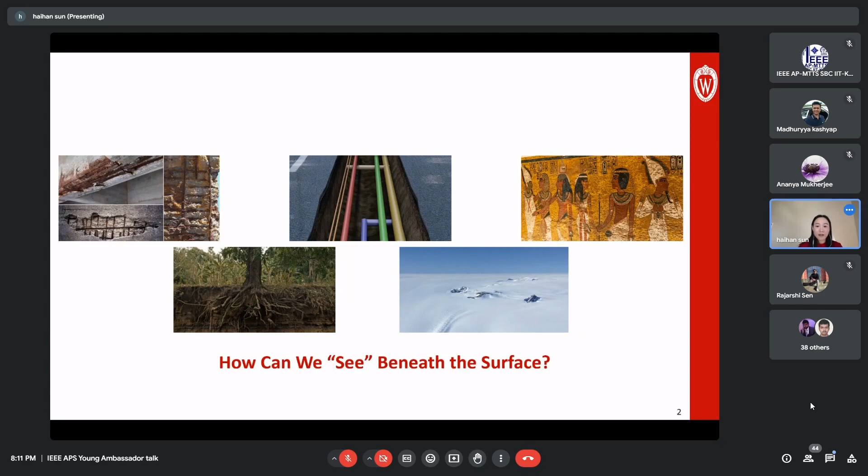Well, ground-penetrating radar is a non-destructive tool that uses electromagnetic waves to inspect the subsurface environment. If we use ground-penetrating radar, or in short GPR, to scan an area, the transmitting antenna sends out electromagnetic waves into the ground. When the wave hits a buried object with different electrical material properties, the wave will be reflected back to the surface and acquired by the receiving antenna.

At one antenna location, we'll receive the reflected signal as a function of two-way travel time and signal amplitude. We call it a one-dimensional A-scan. In this case, we'll observe two main reflections. One is the surface reflection coupled with the antenna crosstalk, and we'll have the object reflection shown here. The distance from the object to the surface can be calculated based on the two-way travel time and the propagation velocity of electromagnetic waves in the subsurface medium.

And the power of this reflected signal from the object is governed by the well-established radar equation. It is a complex function of the transmitting system, receiving system, signal loss at the air-to-ground interface and along the propagation path, the object radar cross-section, as well as any polarization mismatch in the wave transmission and reflection process.

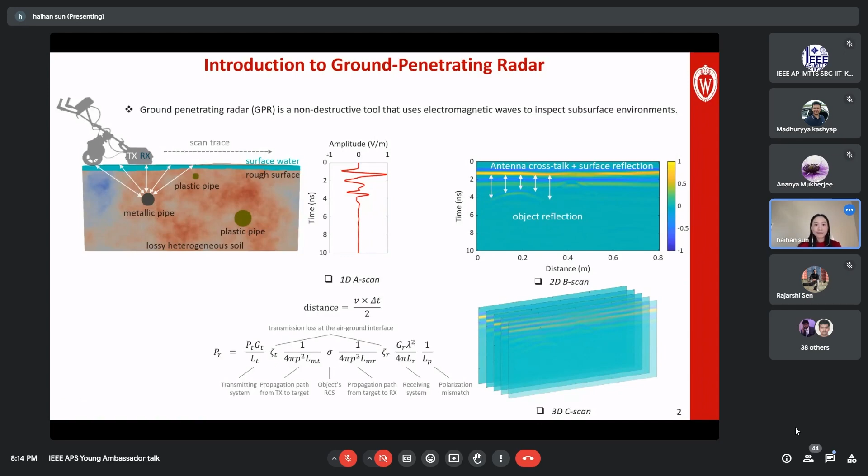GPR is definitely not a new technology. It has a long, rich, and fascinating history spanning across different disciplines over the past century. I read some stories online, and it turned out that GPR technology can be dated back to 1904 when a German engineer, Christian Hülsmeyer, invented the early form of radar to detect distant metallic objects. Then 6 years later, 2 German scientists patented the first use of continuous wave radar to locate buried objects.

Then later on, Dr. Hülsenbeck patented the first use of the pulse technique to detect subsurface structures, which greatly improved the depth resolution. And for the next 30 years, ground-penetrating radar was mainly used to probe the depths of ice, glaciers, and fresh water, as these are ideal media for electromagnetic wave transmission.

Then the turning point came when NASA launched the Apollo 17 mission, which used a GPR unit to study the moon's surface profile and interior structures. And this historic moment really brought GPR into wide attention and triggered widespread applications of GPR.

For the next 20 years, GPR has been utilized in many different fields, for example, in civil engineering to locate voids, tunnels, cables, in geotechnical engineering to explore underground mineral resources, in archaeology to find buried structures and caves, and in the military to detect tunnels and landmines to save human lives.

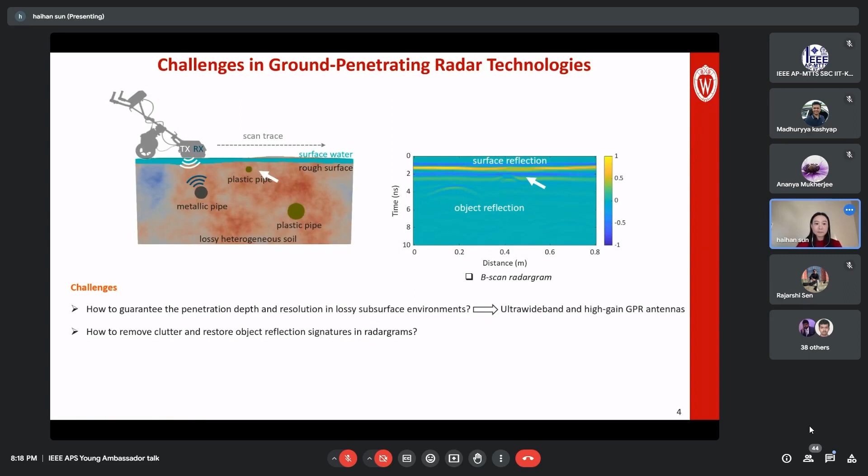And then once we collect a GPR radargram, how can we use the object signatures in the GPR radargram to characterize subsurface objects? For example, the object size, material, orientation. This will greatly help us to improve our understanding of the subsurface object. And is there a way to map the subsurface environment with high resolution? This is the ultimate goal for us, to visualize the subsurface environment, right? So all of these challenges call for advanced data processing and imaging algorithms, and our research has been devoted to addressing these challenges.

So first, to improve the detection capability of objects of different characteristics at different depths, we have invented and tailored multiple dual-polarized antennas and compact arrays to well detect objects in different specific applications, which I'll introduce later. A common feature of these antennas is that they all have broad bandwidths over 4 GHz. The frequency band generally ranges from below 1 GHz to above 4 GHz.

And these antennas enjoy great port isolation and have high antenna gain, which guarantees the penetration depth, resolution, and polarization purity of the ground-penetrating radar system. These antennas are specially tailored to have a compact size, so we can easily implement them in a portable GPR system. Once we designed antennas with high performance characteristics, we have used them to collect radargrams in many different applications.

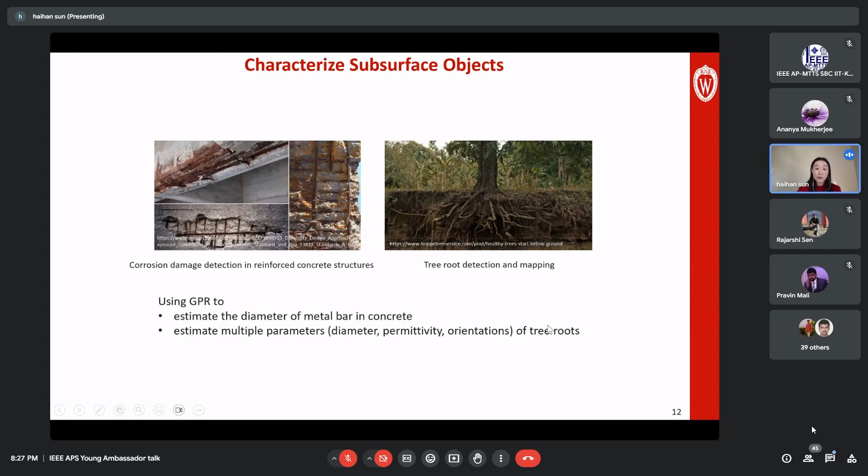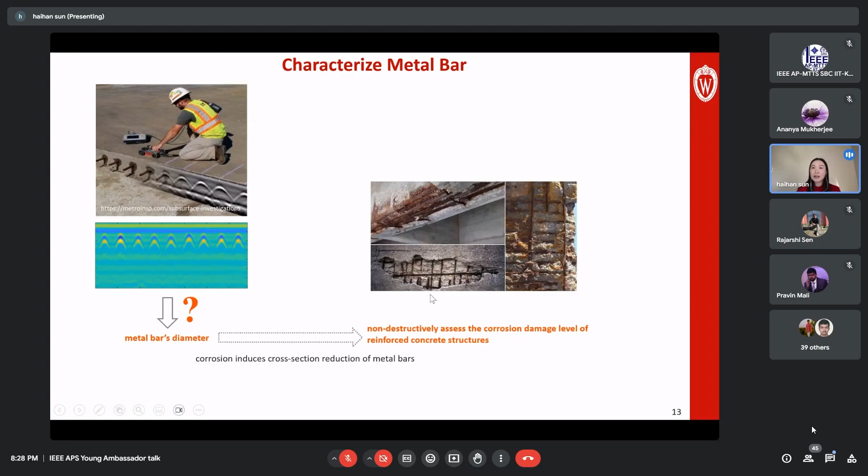GPR has been a great tool to detect reinforcing bars in concrete, because we know metal is a great reflector, it's a total reflector, right? But how to quantify the metal bar size has been a very challenging task. You probably want to know why we should estimate the size of the metal bar? Well, the thing is that corrosion induces cross-section reduction of the metal bar. So if we could precisely measure the metal bar's size embedded in the concrete infrastructures, we can use it as an indicator to assess the corrosion damage level of the reinforced concrete structures.

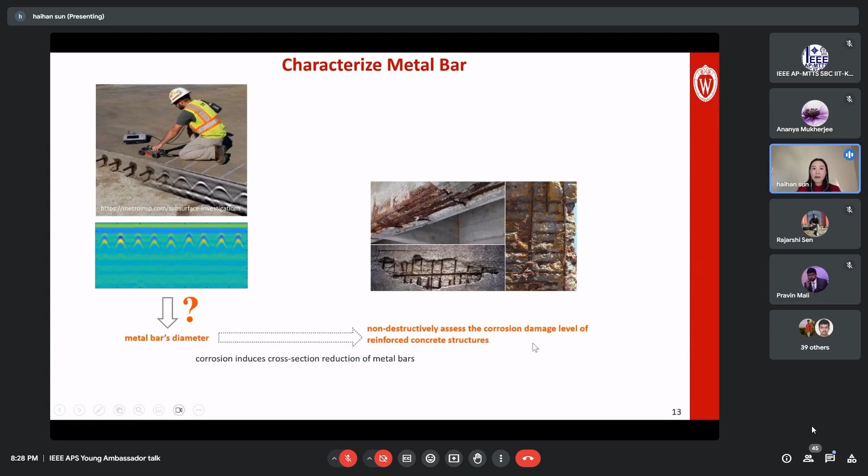So how can we precisely measure the diameter of the metal bar? Well, we have developed two methods to achieve that. The first method is based on the radar cross-section theory. So we call it a radar cross-section method. For this method, we know that metal bars will reflect electromagnetic waves, but metal bars with different diameters respond differently to electromagnetic waves with different polarizations.

So for example, if we use an antenna system with polarization that is parallel to the metal bar's orientation to detect this metal bar, we can receive a pretty strong reflected signal from the metal bar due to polarization match. But if we use an antenna system with polarization perpendicular to the metal bar's orientation, we'll see that the reflected signal from the metal bar is much weaker compared to the parallel polarized case, right? So what we want to do in our work is establish the relationship between the diameter of the metal bar and the ratio of the reflected power in these two dual-polarized antenna cases. And then if we could establish this relationship, we can use the power ratio to derive the metal bar's diameter in real measurements, right?

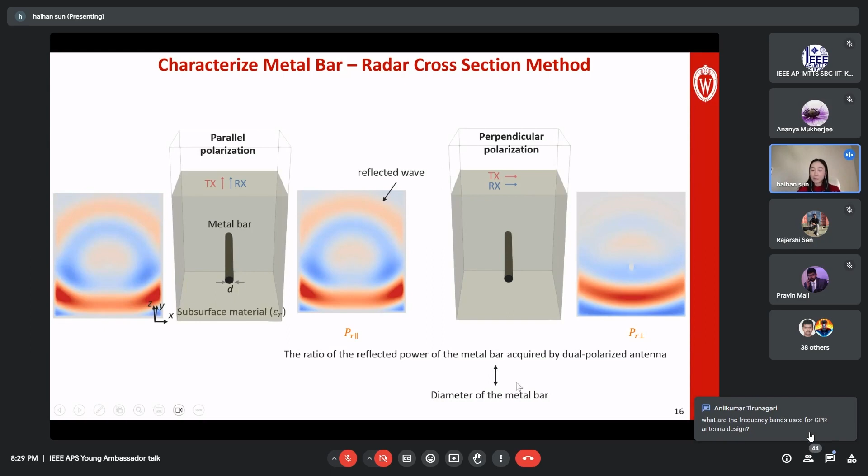So our method is like this. If we only use one polarized antenna to detect the reflection from the metal bar, for example, we use an antenna with polarization that is parallel to the metal bar's orientation to detect this metal bar. We know that the reflected power of this metal bar is governed by the well-established radar equation, as we mentioned earlier. It is a complex function of multiple system parameters, the signal loss along the propagation path and on the air-to-concrete surface, and the scattering width of the metal bar. The scattering width of the metal bar is directly associated with the diameter of the metal bar.

So you might think, well, seems like we can use this acquired power to directly characterize the metal bar's diameter, right? But the challenge is that in real cases, there are so many system parameters that are hard to be precisely quantified. But don't worry, we can introduce an antenna with a different polarization, the perpendicular polarization, to acquire the metal bar's reflected signal. And in this case, the reflected signal from the metal bar is also governed by the same radar equation shown here, while the only difference is the scattering width of the metal bar to this perpendicular polarization.

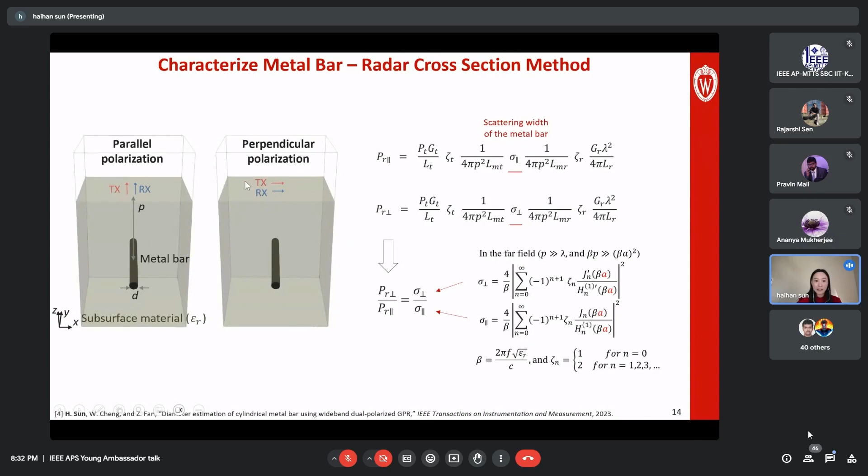But when you think about ground-penetrating radar, it's a wideband device. So it's not very feasible to use a single frequency to characterize a wideband performance. Sorry, I'm not sure why the equation is shown here, but it's easier and more robust to use the ratio of the maximum power collected by these two antenna systems in the time domain to characterize the metal bar's radius. So we further incorporate the inverse Fourier transform and broaden this power ratio relation to the wideband power ratio relation.

So what we've done here is that we build a relation between the peak power ratio acquired by these two antenna systems and the metal bar's radius, as shown in this equation here. We won't go into the mathematical details due to the time limit. But once we have this relation, we can use this relation plus the power ratio acquired in the measurement to characterize the metal bar's diameter.

In our experiment, we have used our self-designed dual-polarized Vivaldi antenna operating across a broadband from 0.5 GHz up to 3 GHz to detect the reflected signal from the metal bar, calculate the peak power ratio, and then use this equation to derive the metal bar's radius or diameter. We have conducted numerous simulations and experiments to verify the performance of our methods. And here we show the estimated results in 8 different metal bar cases. The metal bars have different diameters.

From these images, we can see that the estimated diameter agrees very well with the real diameter of the metal bar. And the estimation error is well below 10%. It's below 6% in different cases. So this provides a method to well characterize the metal bar size. But you might notice that this is a numerical-based method.

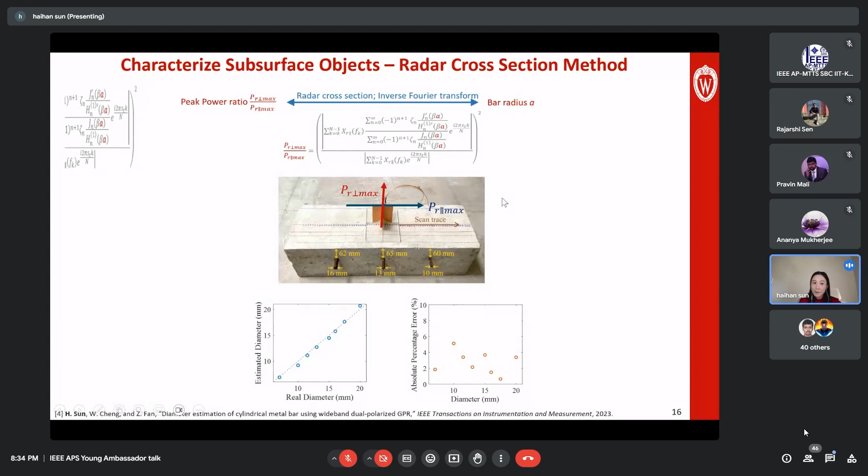So later on, my collaborator, Dr. Weixia Cheng from Nanyang Technological University, suggested: can we combine the imaging algorithm with metal bar sizing to provide a more intuitive understanding of the metal bar? So we can see the metal bar and know the size, right? So later on, we carried out another work where we use a linear antenna array with 15 Vivaldi antenna elements to acquire the reflected signal from the metal bar. Basically, we acquired 15 by 15 full matrix array data for each metal bar.

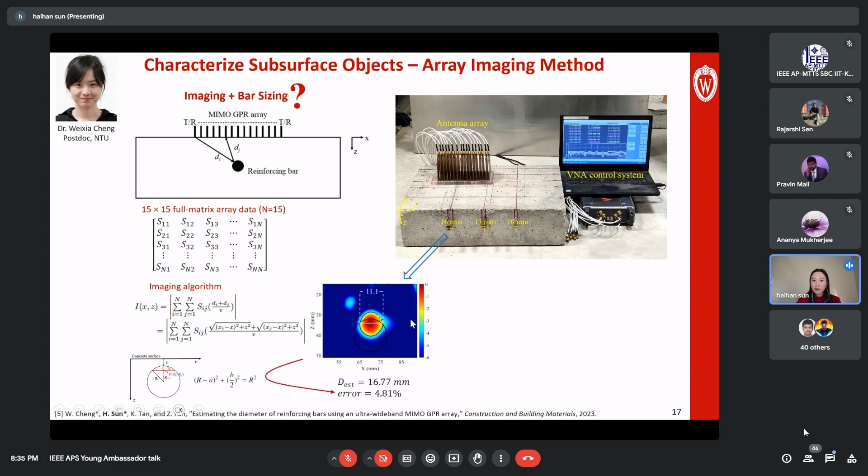And then we adopt the conventional imaging algorithm, which is the delay-and-sum imaging algorithm, to produce high-resolution imaging of this metal bar. And then we measure the 3 dB coordinates of this image and further correlate it with the metal bar's diameter. Here we show the imaging results of the 3 metal bars in the concrete and the estimated diameters in these 3 cases. We can see that compared to the ground truth diameter of the metal bars, we can well estimate the diameter with errors well below 10%. In the 3 cases, the errors are below 5%.

So these methods provide a more intuitive understanding of the metal bar because we can see the imaging result of the metal bar and we can know its diameter. We have further implemented these methods to monitor the entire corrosion process of the reinforcement bars in concrete. And we found out that the imaging results of this array are highly sensitive to very minor changes of the metal bar in the corrosion process. And we are currently working on advancing these methods to really provide an indication of the corrosion damage level in reinforced concrete infrastructures.

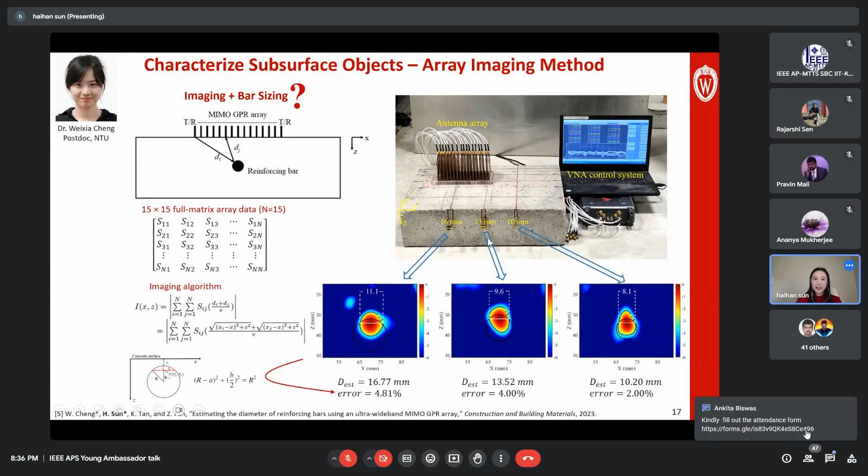Well, these are the 2 works related to characterizing rebar, the size of rebar, in our research. And now we are going to move to talk about how we can characterize the tree roots, the parameters of tree roots. So we are going to move from civil engineering to environmental engineering.

Well, different from rebars in concrete, where we know the material property, we can consider it as a perfect electric conductor without causing much trouble. And in reinforced concrete structures, the orientation of the rebar is usually well planned. But for tree roots, the scenario is much more complicated because the tree root reflection in the radargram is a complex function of multiple tree root parameters, including the root depth, diameter, permittivity, and the orientation angles.

Conventional methods can only estimate 1 parameter at a time without considering other parameters, so they have limited accuracy in estimating each tree root parameter. In our work, we aim to simultaneously derive the 5 tree root parameters so that we can further facilitate mapping of the tree root and the health examination of the tree root.

But first, tree root as an elongated object depolarizes electromagnetic waves based on different orientations, right? So to guarantee the detection capability of tree roots, we first use our self-designed dual-polarized antennas together with a vector network analyzer to collect 4 polarimetric radargrams shown here. The 4 polarimetric radargrams greatly improve the detection capability of tree roots in different scenarios.

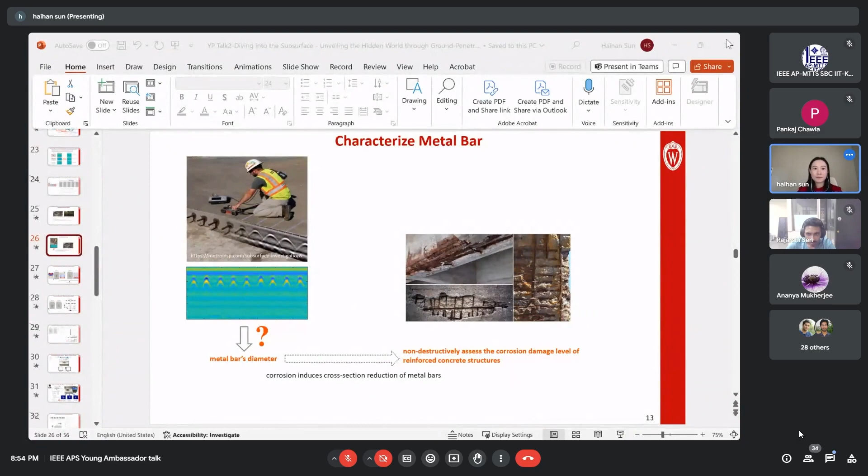Ma'am, the next question is by Pankaj Chawla. Sorry, next question is? The next question is by Pankaj Chawla. The question is, in slide 14, what is zeta signifying, reflection coefficient? Slide 14. Am I missing some slides here? I guess the question is related to this work. So zeta is reflection coefficient? Yeah, the tilde part for that perpendicular polarization. What would that signify, sir? This one, right? Yes.

It corresponds to the reflection coefficient at the air-to-concrete surface. No, sorry. This is not the reflection coefficient. This is the transmission coefficient, because the signals transmit into the concrete and then transmit back. So these are the transmission coefficients.

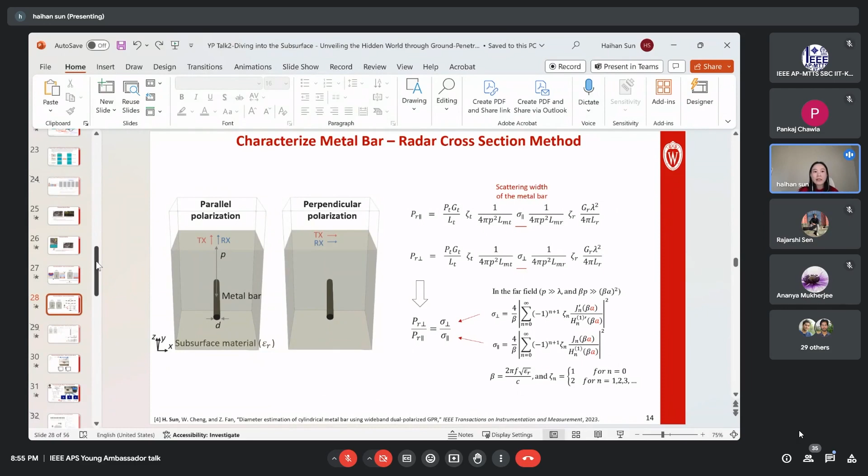Our next question is: explain the front-end requirements of the GPR, what's the power, the rise time required, and so on. Okay, so in our lab experiment, we adopted a simplified GPR structure shown here, where we used a vector network analyzer to connect with antennas of different characteristics for subsurface sensing applications.

The GPR can sweep the frequencies across a wide band, so we generally regard this system as a stepped-frequency continuous wave system. Why we adopt this design instead of designing circuits integrated with our antenna is that we actually worked on many different applications, where different applications respond to different frequencies.

So we want to leverage the wideband capability of the vector network analyzer and connect it to different antennas for different applications. So in our research, we used a VNA for that purpose.

And for the power, there are regulations that limit the power that we can send out using ground-penetrating radar, because we don't want to interfere with other communications, for example, mobile communication, because bands sometimes overlap with each other, right? So the output power in our system is below 0 dBm. Mostly we work at 0 dBm or -5 dBm. Yeah, thank you.

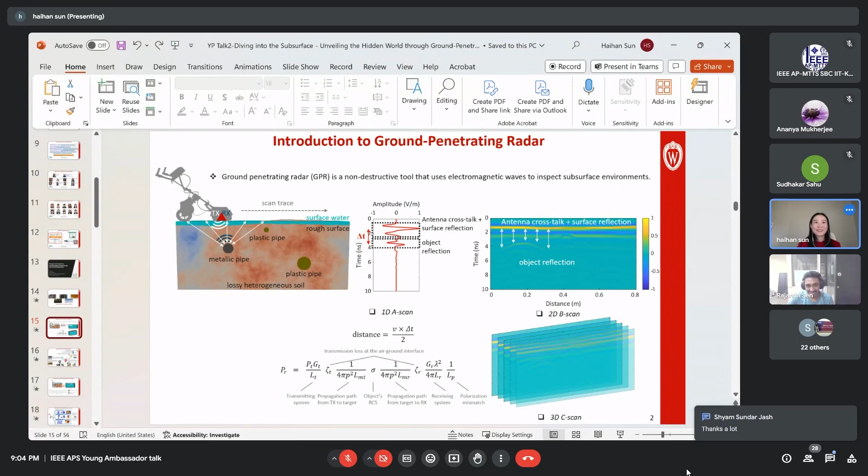Ma'am, is there any current work that your group is doing regarding GPR technology? Sorry, could you repeat the question? Any current projects or work that your group is currently doing regarding GPR? Yeah, this is a wonderful question. So currently I'm a first-year assistant professor, and my two PhD students will join our group in the upcoming fall. So currently I only have undergraduate research.